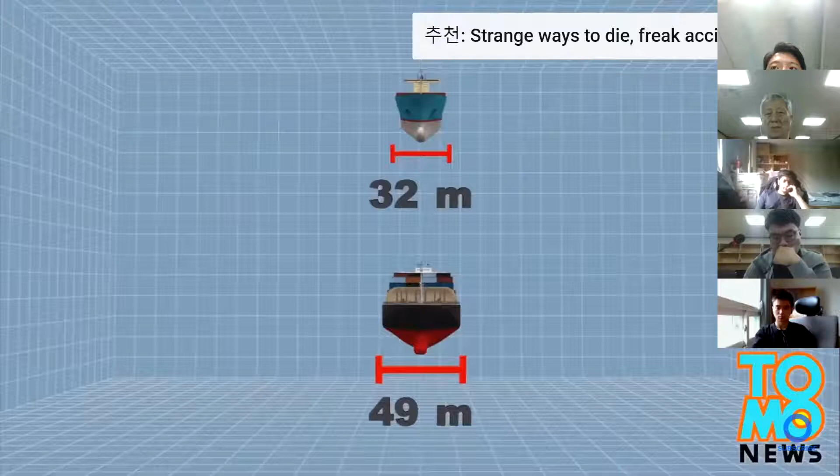Triple, from the current roughly 4,500 standard container limit to roughly 12,000 standard containers. These changes will make the Panama Canal more competitive with the alternative Suez Canal route, which currently accommodates much larger ships.

So there is a story about the Panama Canal extension. It is already finished, so now it's operating. Several years ago. And this is a drilling ship.

Oh, what is this? Oh, this is a research ship, from probably Japan. And the weight of the ship is

57,000 tons, length 210, and breadth is 38 meters. And the tower height, at the center of the ship, there is a tower. Tower height is 130, and depth is 9.2.

And then the travel length is 14,800 nautical miles. This is important because the research vessel needs to travel far away, say to the Arctic Ocean, and stay there for a long time, months, so the fuel oil needs to be enough for long traveling. That's why this is an important number for a research vessel.

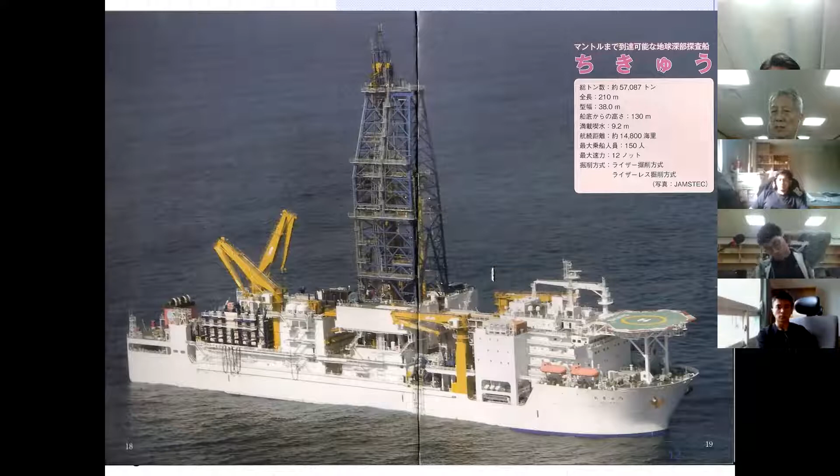And this is the arrangement of the oceanographic research ship. Number 1, navigation bridge, public space, accommodation, forepeak, storage, double bottom, engine room, and steering; fuel oil tank is 11, potable water tank. And also there is a video.

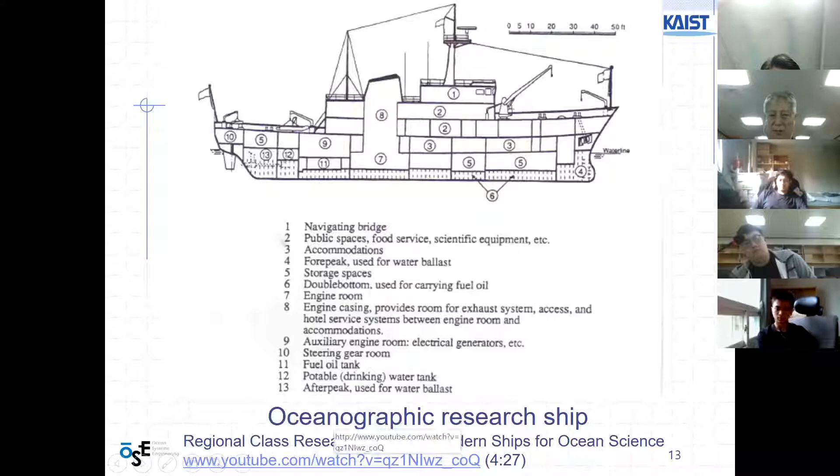70% of the Earth is covered by the ocean, and the ocean interacts with the atmosphere and the land. Those interactions control the world we live in. Some of the most important questions facing society include climate change, the future of food supply, sea level rise, geohazards such as earthquakes and volcanism along coastlines. It's very important to understand the basic scientific underpinnings of all these different processes.

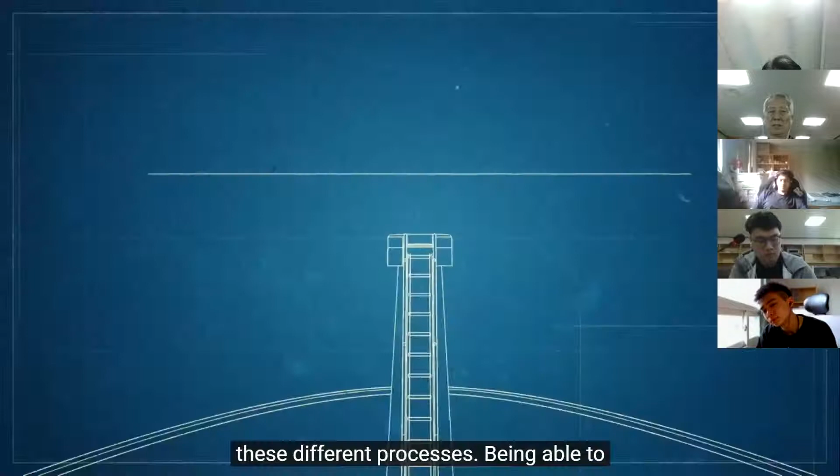Being able to go out to the ocean and make observations is the most critical component of oceanography. And it's going to rely on new vessels with new capabilities to use the ship efficiently and gain the maximum benefit for the most people.

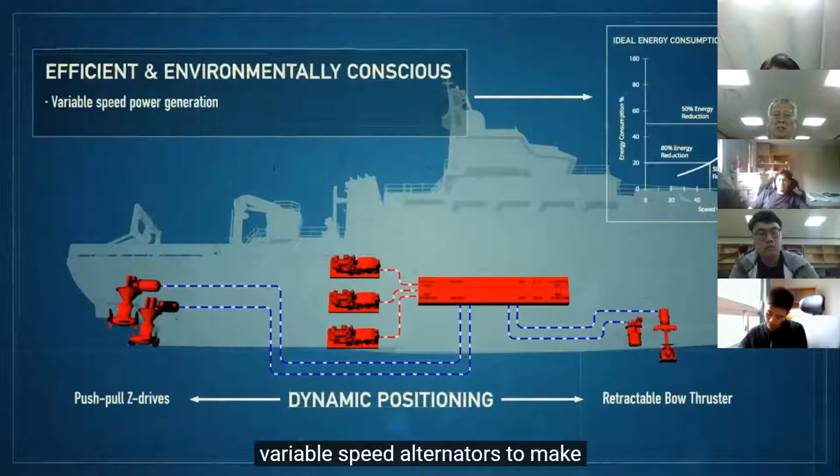When we were approached by Oregon State, one of their key objectives was to make this as green a ship as possible. We've gone to great lengths to incorporate the latest technologies into the ship to keep it as environmentally friendly as we can. We've decided to use variable speed alternators to make electricity.

We've also used LED lighting wherever possible. We're using waste heat, so the heat from the engines, we'll use that to heat domestic water and to actually make potable water for the ship.

The design of the ship is very, very important to the efficiency of the ship. And so we went to great lengths to make this as low resistance a hull as we could, in keeping with the desires of the scientists to have bubble sweep down minimized for the performance of their instrumentation.

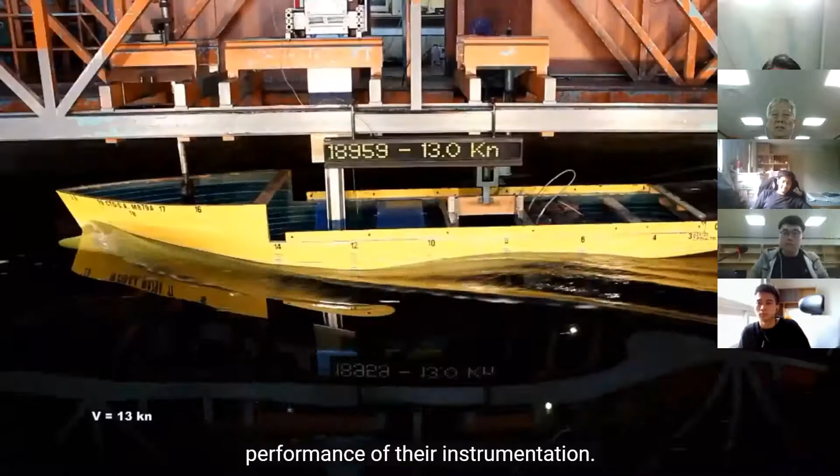Part of the design has been to incorporate a U-tube anti-roll tank. And so that means the vessel can operate in more challenging environments, and a lot of our coastal environments do see some pretty severe weather conditions, and we like to be able to investigate ocean processes under all conditions, not just on a sunny day.

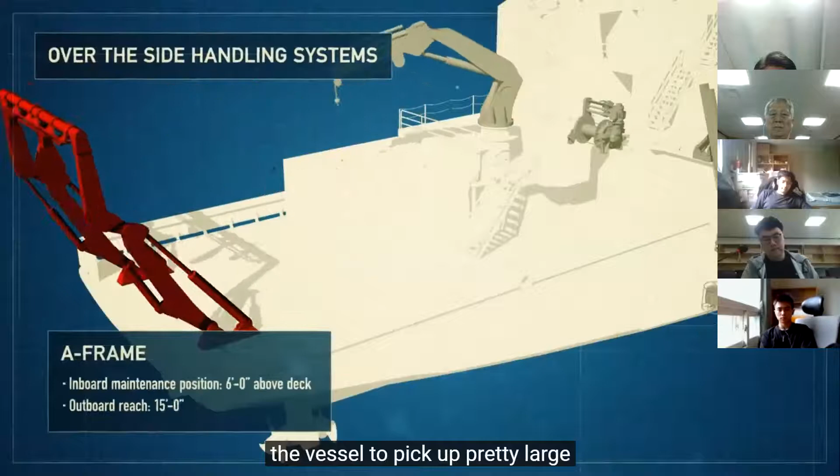We've got a double articulating A-frame, which will allow the vessel to pick up pretty large packages. The launch and recovery system will be designed so that it can put the CTD almost down to water level.

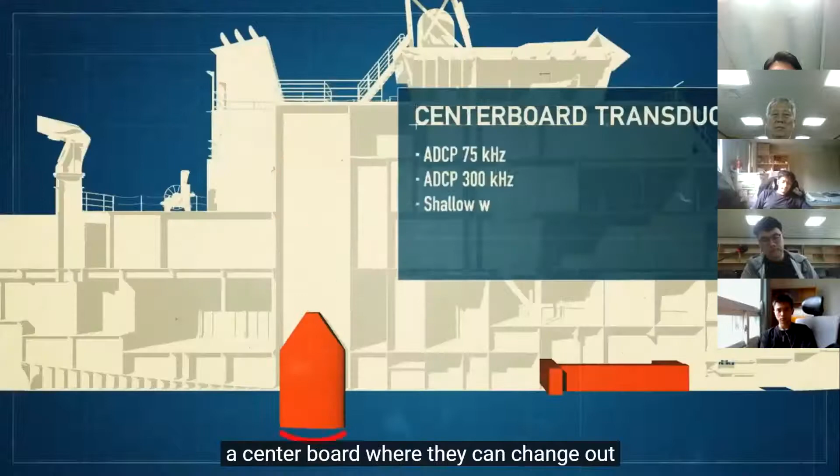They have a centerboard where they can change out some of their transducers. They also have a pretty extensive transducer array.

There's always, for this project, been a drive to collect as much data as possible and as continuously as possible. Telepresence is providing real-time data to enable virtual participation to researchers and stakeholders on the shore. So we've got a team assembled that are developing the technologies to enable this.

And in terms of moving forward in the 21st century, that's very exciting. And that's where we need to be.

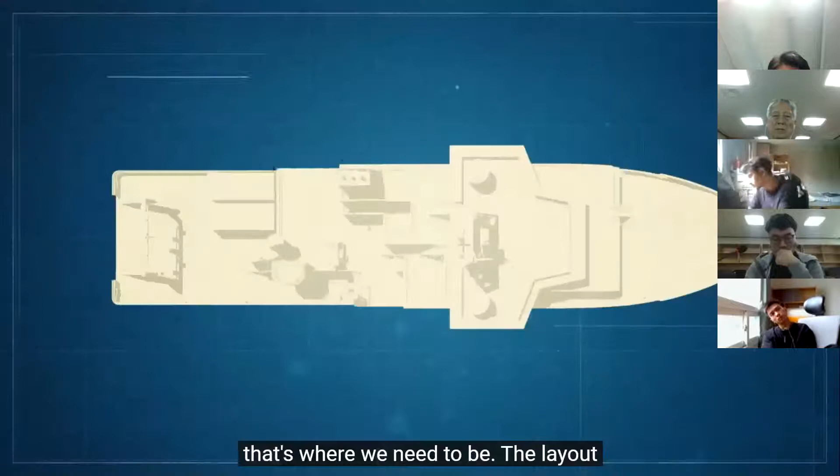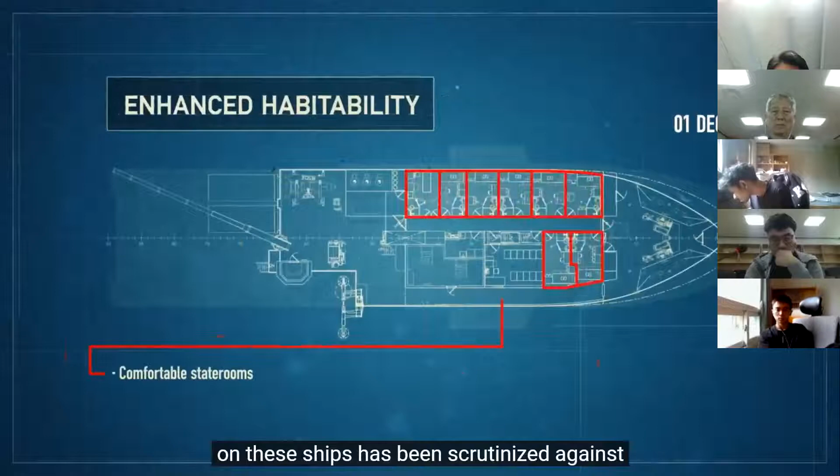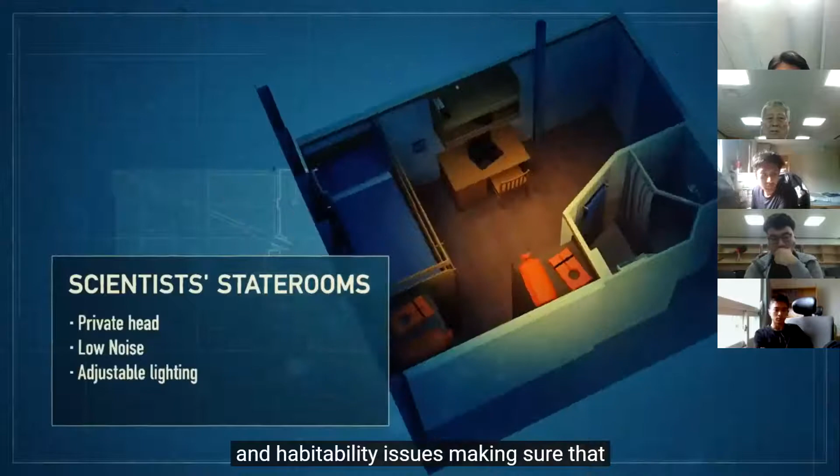The layout was designed to balance people's habitable enjoyment versus the practical requirements of why they're at sea. And every detail on these ships has been scrutinized against the practicality of being underway, doing science at sea. So we put a lot of thought into creature comforts and habitability issues, making sure that they ride well, making them places that people want to be.

I really am passionate about what it is to be on a research vessel. It's a really special opportunity for a scientist, not only to do your science, but to be in a community at sea. I would hate to lose that.

If we're really going to understand and answer questions about our future, how we can leave our children and our children's children a better planet where food supply is more constant, where people can have clean water, where plants can grow, we really need to understand what's going on in the oceans.

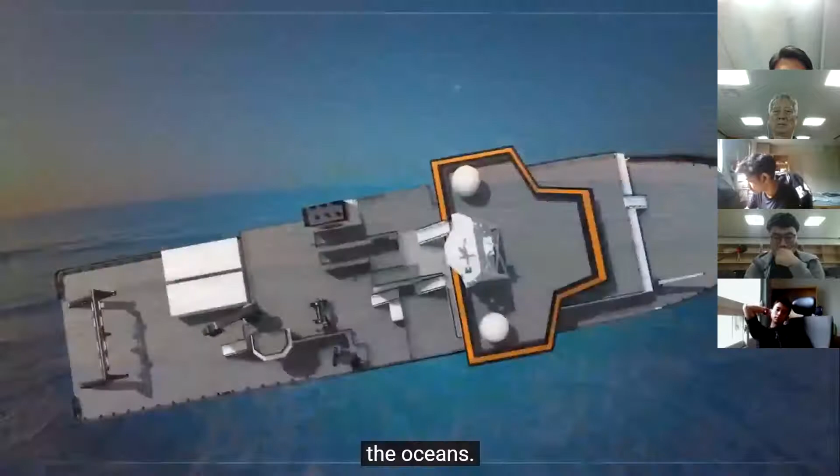Right? Question? No, go on to drill ship.

Oh, there is another video.

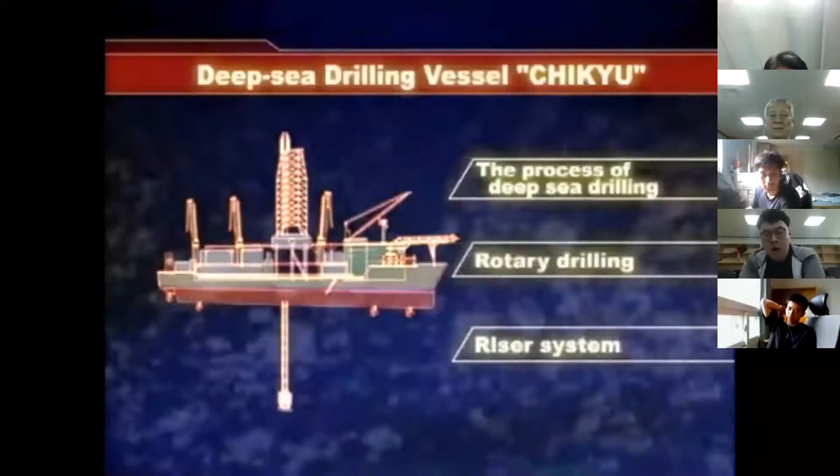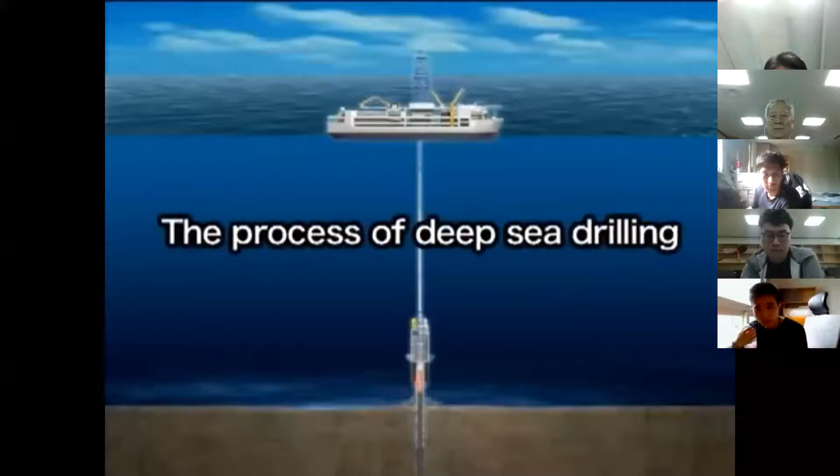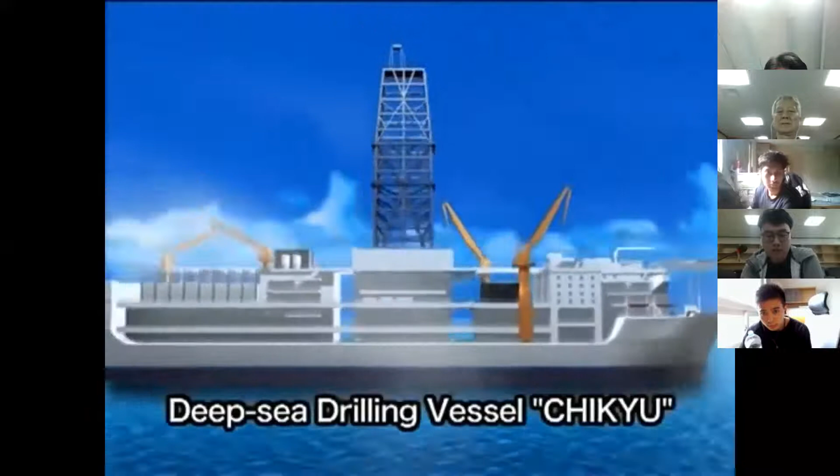How does the deep-sea drilling vessel Chikyu drill into the seafloor? When the vessel arrives at the drilling site, it receives a satellite signal that helps it move into the exact position required. The vessel has 6 propellers that rotate a full 360 degrees and keep the vessel in one position, preventing it from drifting due to wind, waves, or sea current.

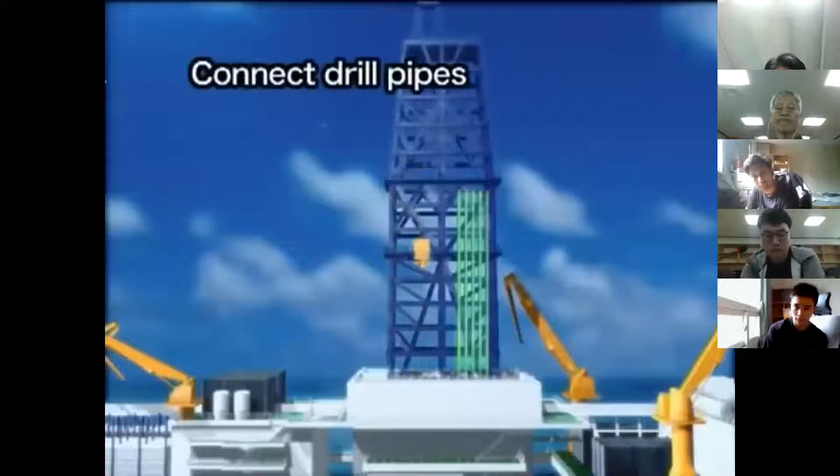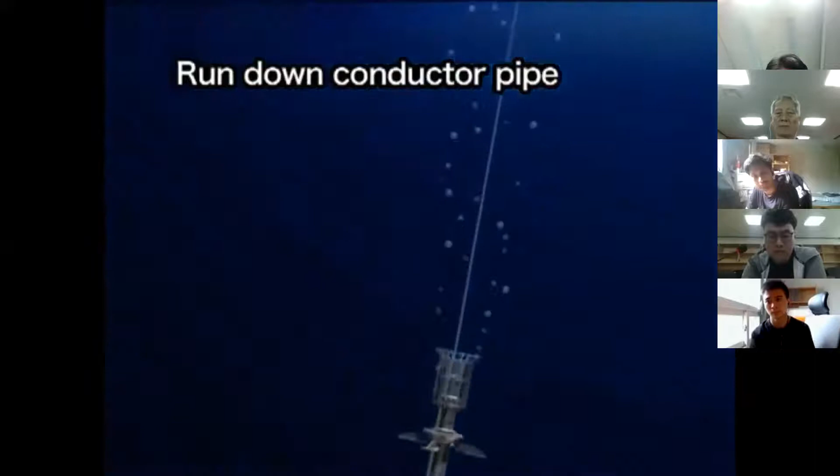First, the conductor pipe is installed. As the drill pipes are connected, the conductor pipe and guide are run down to the seafloor. After the conductor pipe penetrates the seafloor, the drill pipe is released and pulled back to the vessel.

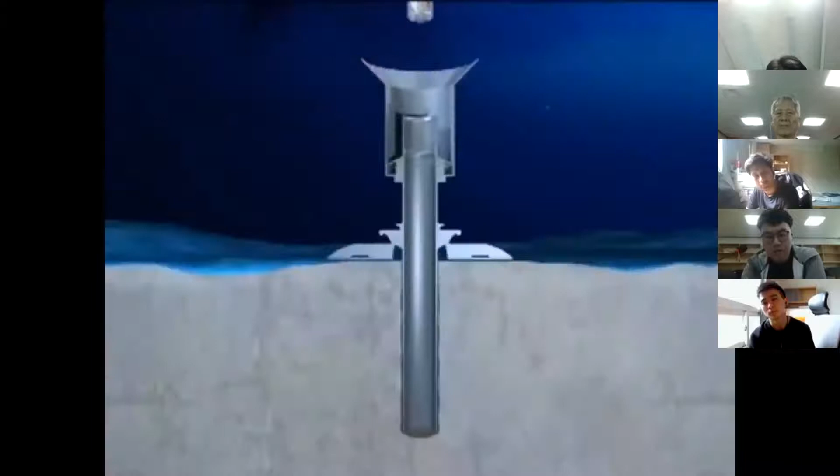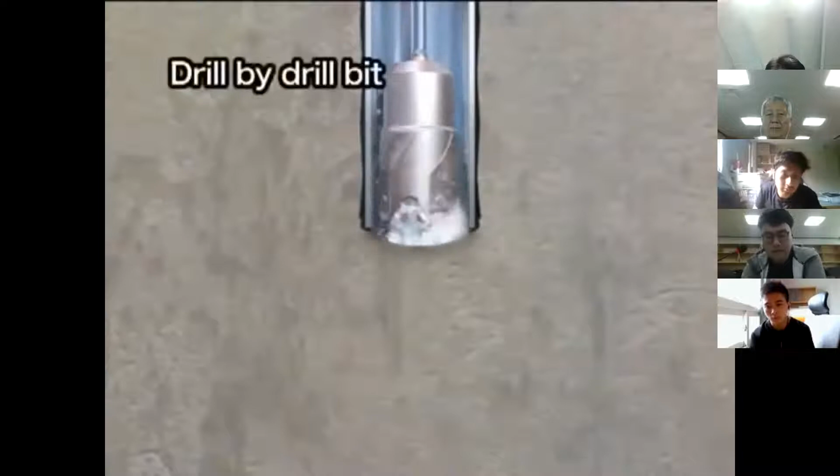A large drill bit connected to the bottom of the drill pipe is run down to the seafloor. The drill bit is led down to the bottom of the hole through the conductor pipe. The drill bit rotates and drills the sediment and rock below the seabed. Seawater is sprayed from nozzles on the drill bit to raise the cuttings to the seafloor. After drilling several hundred meters, the drill bit is pulled back to the vessel.

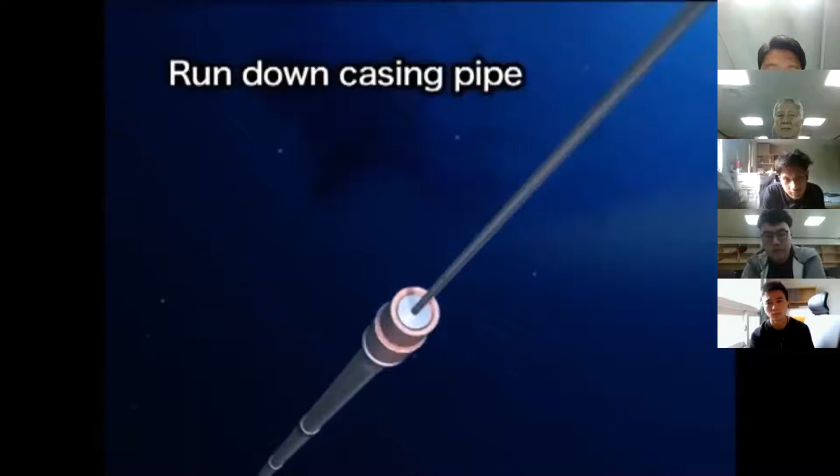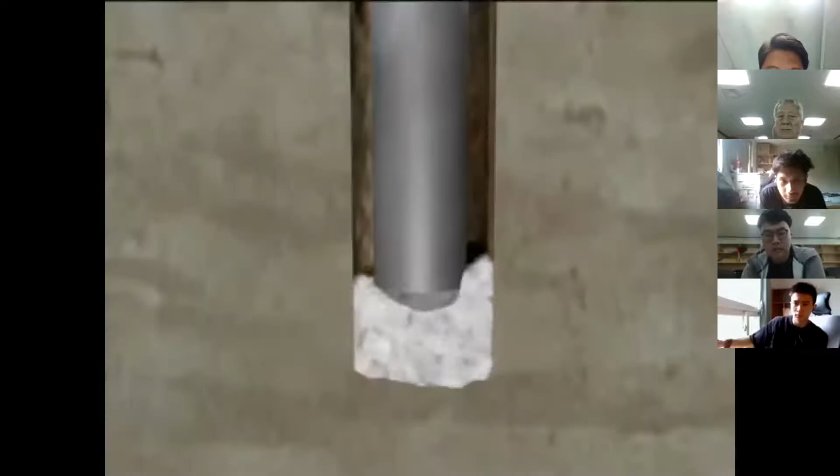A casing pipe, about 50 centimeters in diameter, is set into the drilled hole to keep it from collapsing. The casing pipe is run down through the conductor pipe and inserted into the hole using the drill pipe. Cement is pumped into the space between the hole and the casing pipe to fix the pipe in place. After cementing, the drill pipe is released and pulled back to the vessel.

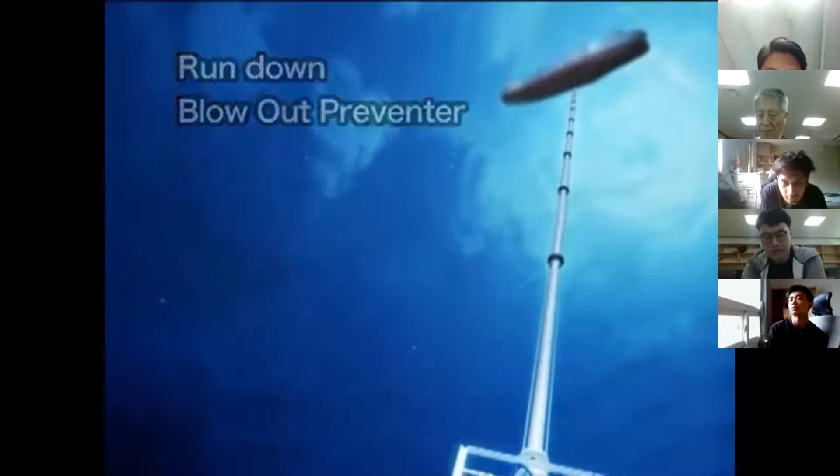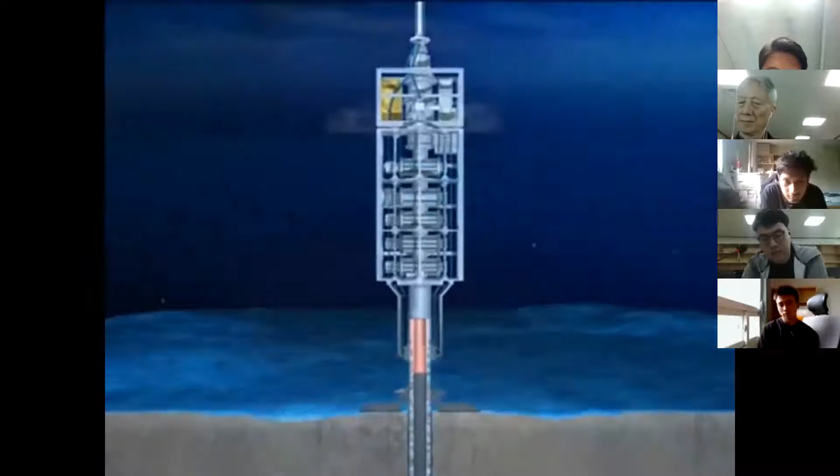The Chikyu is equipped with a riser system in order to drill into the earth even deeper. As the riser pipes are added one after another, the blowout preventer is run down to the seafloor. The blowout preventer is connected to a wellhead located on top of the casing pipe. The vessel is now connected to the seafloor via the riser pipe. A drill bit, smaller than the one first used, is run down through the riser pipe and casing pipe.

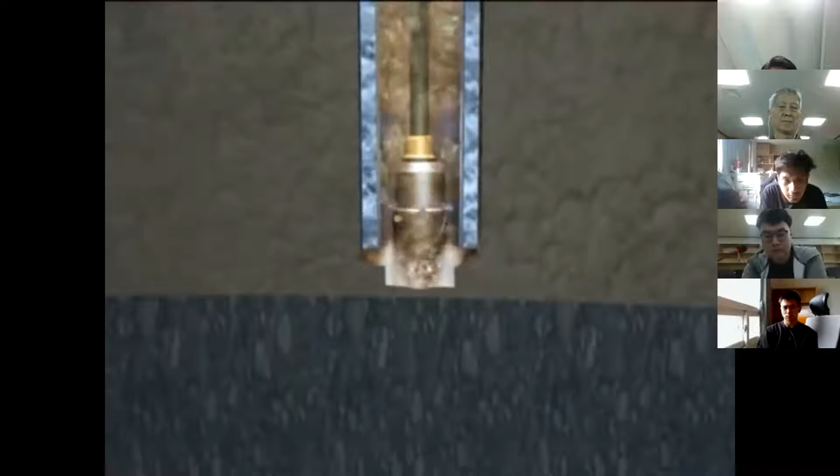The drilling begins. Once the riser pipe has been connected, drilling mud is used instead of seawater. When the target depth is reached, the drill bit is pulled back to the vessel.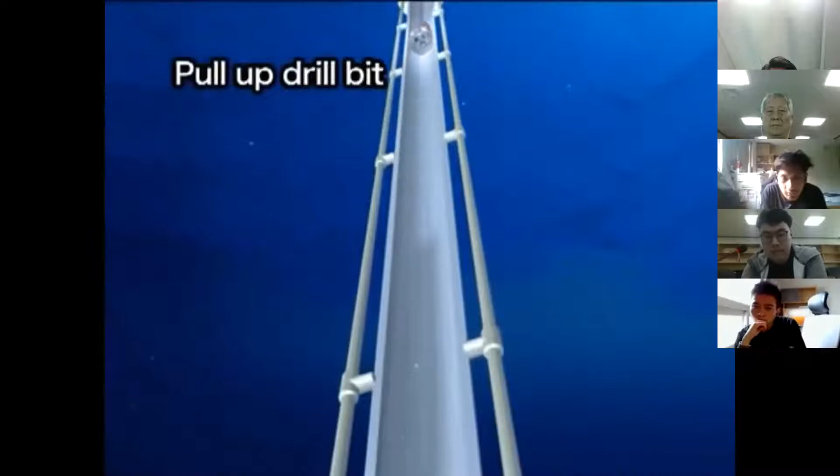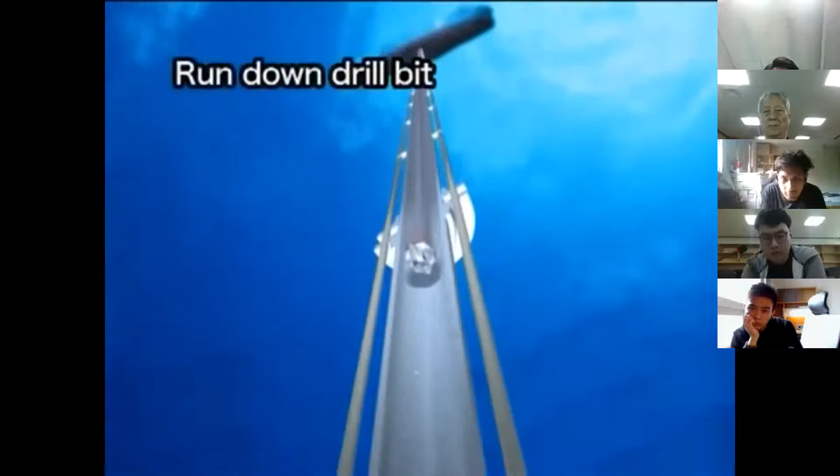To drill the hole even deeper, a narrower casing pipe is set in to protect the drilled hole. After the casing pipe has been installed, cement is pumped into the space between the hole and the casing pipe to fix the pipe in place. Again, an even smaller drill bit is run down through the riser pipe and casing pipe, and the drilling continues. Repeating this process, the Chikyu will drill through the ocean crust.

Do you have any information? So, yeah, Professor, question? They drill through the cement every single time? Well, depending on the situation. If the soil there is soft, they need some kind of protection, otherwise it can collapse or be filled with other material. So it depends on the situation and how long they will use that pipeline or hole - they may use different methods.

I was wondering, after it's done - I mean that spot is depleted of the resource they're looking for - does the cement and everything remain, or do they remove it? They remain, yes. Because otherwise, sometimes the reservoir can be filled, or empty, and that can be another problem. So they may need to fill in the reservoir hole with water sometimes, and then seal the hole. Many people have the idea to use that as a temporary tank for CO2 gases.

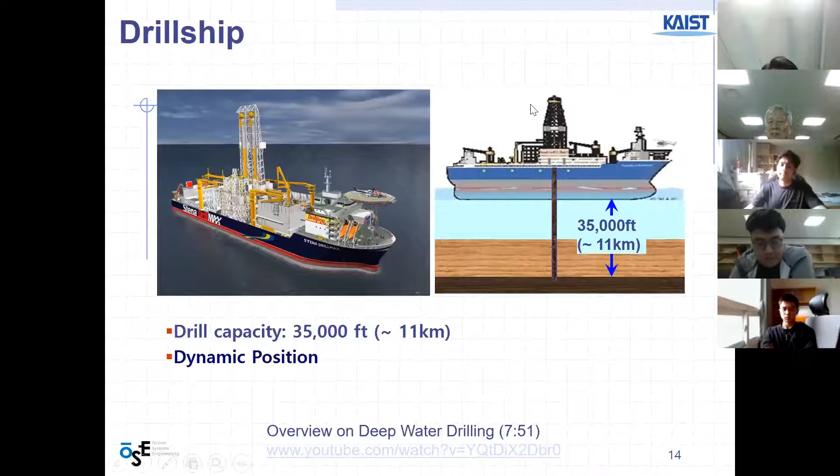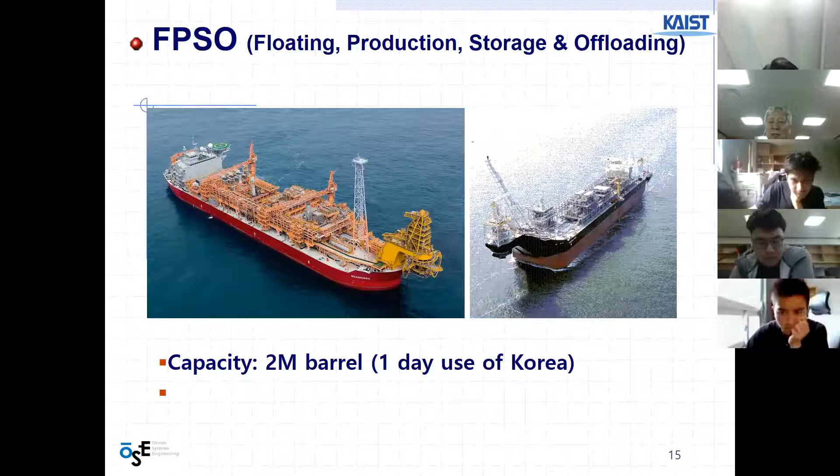Let's go on to the next slide. FPSO, we already saw this one. Capacity 2 mega barrel. At that time, this was equivalent to one day's use of oil for the whole of South Korea.

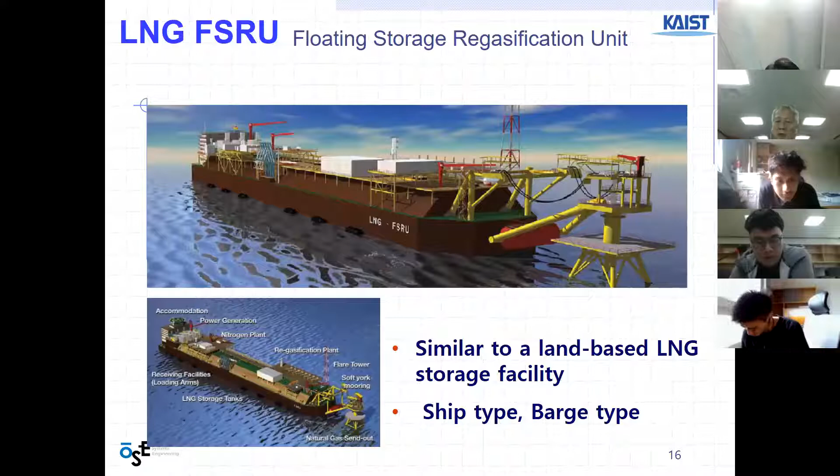So you can expect the size. And this one is similar, but this is a floating storage and regasification unit for LNG, similar to a land-based LNG storage facility, but it is a ship type.

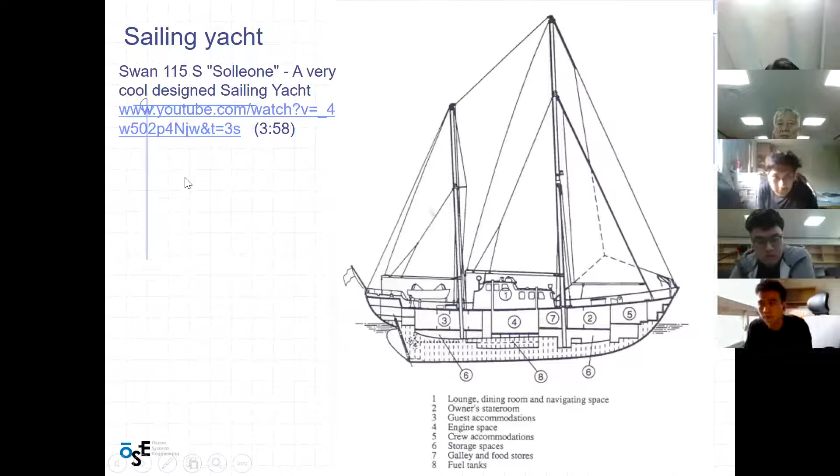And sailing yacht. Oh, there is another video. Okay, let's see this one.

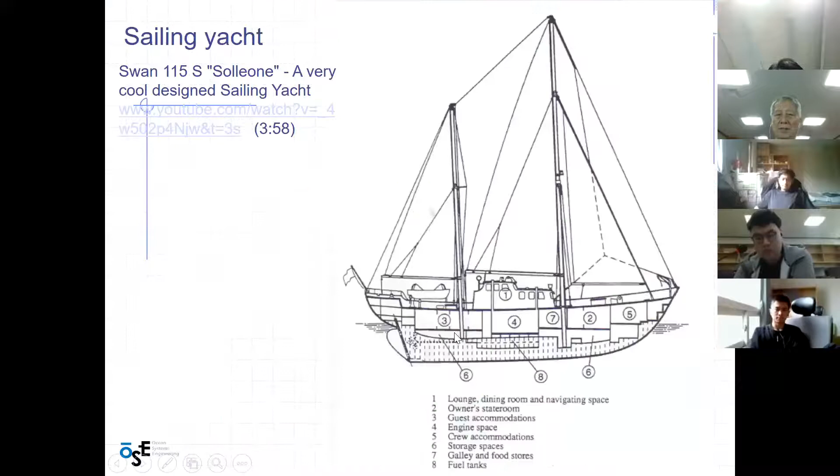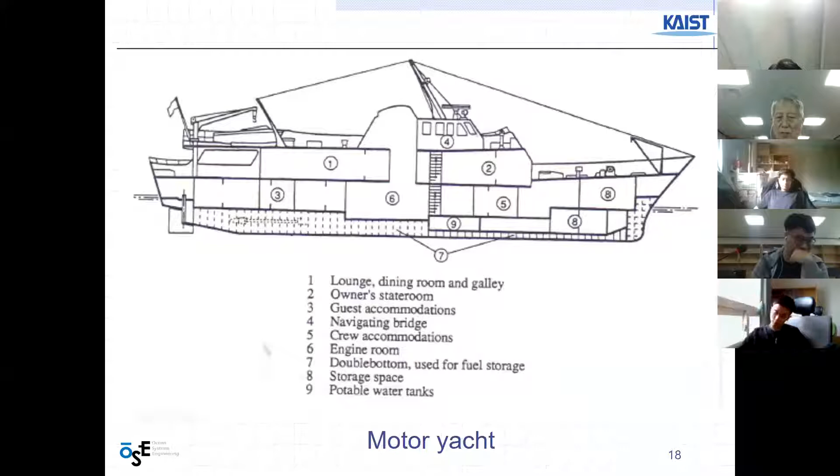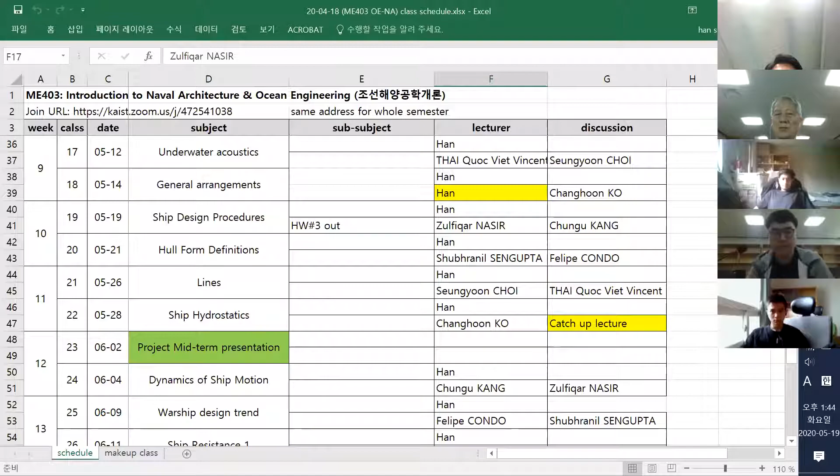Okay, that's it. So, any question? Otherwise, we can go on to the discussion session led by Changhoon Ko, please. Okay.

So, can you see my presentation? Yes, okay. So today's discussion is about the general arrangement of the ship.

So the first question is about the Sewol incident, a very sad event that occurred in 2014 in Korea. Some experts say that one of the reasons for that incident was overcargoing. This Sewol was a ship which carried both passengers and cargo. So how can we build a safe ferry that carries both passenger and cargo through proper general arrangement of the ship? If anyone has any idea?

Can you? I think we have to give up some portion. If we take safety, then we have to give up overcargoing if we don't have enough money.